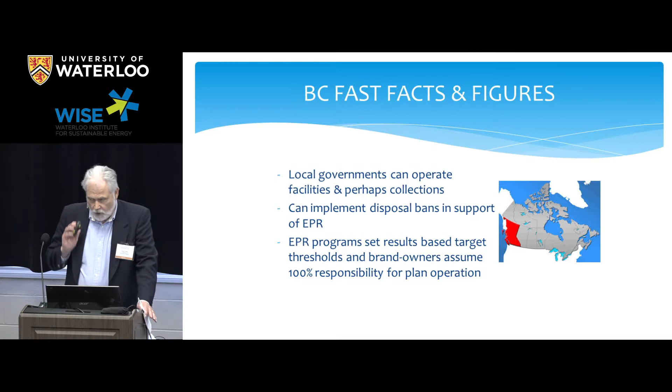BC EPR program targets are results-based. Here's where you're supposed to be. This is what we expect from you. And then the brand owners assume 100% responsibility for getting the plan in place and operating it.

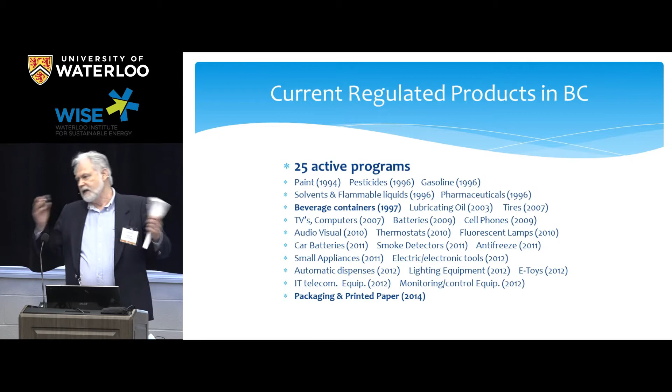Here's the current list. I don't know that it's dramatically different than anybody else's, but we've got 25 programs that are on the go right now. Every 5 years, each of these programs has to go through a program review, an update, and a reapproval. We've just finished, I think 3 of them are just finishing that. They're in the stages of it right now. I've highlighted 2 because that's the story I'm going to talk about later.

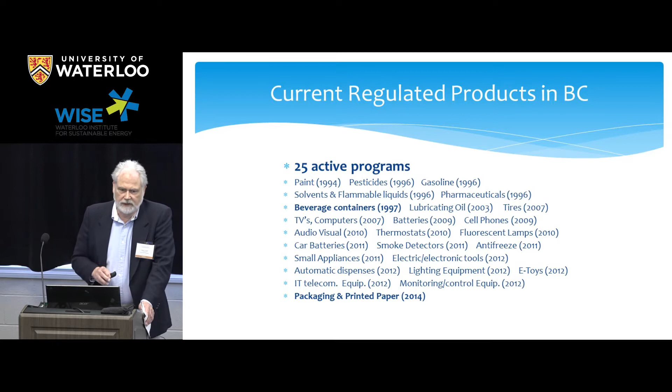The interesting thing is there's a couple of these programs, tires and used oil. The dates that are shown here are sort of the reissue. The original programs were, for all intents and purposes, consumer put money into the pot, went into provincial general revenues, and the province was in charge of running the program. I don't have to tell you that it didn't work very well. The dates that are on here is when they reinvented the program, turned it over to 100% EPR with the brand owners responsible.

Now, in terms of the future, CCME has suggested some future programs. The ministry, when I talk to them, they don't have any set timelines or dates for when they're going into these things. They're there, they're looking at them. Some of them are going to come on sooner than later, but there's no real time set now.

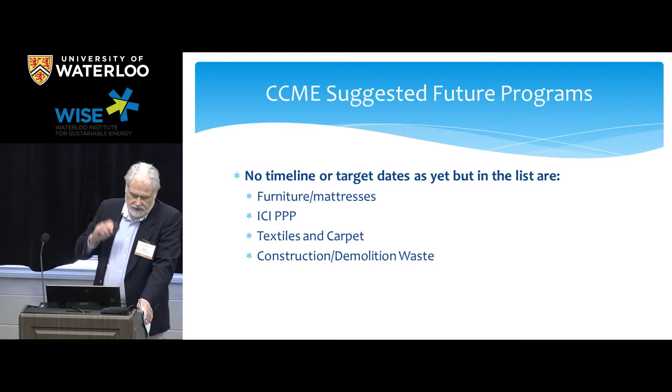The interesting thing is that while most people suspected construction and demolition waste would be sort of the next item, there's been a couple of interesting reports come out, including one that was done in terms of the Strait of Georgia and ocean waters between Vancouver Island and the mainland. One of the things they found is that a significant portion of the samples, the contaminants found in there were not things like polystyrene or polyethylene. They were, in fact, microfibers from synthetic textiles, probably a result of washing machine discharges. So my guess is, with the world being where it's at right now, I wouldn't be surprised to see that textiles would be sort of the next program if they go into it soon.

So now I'm going to tell you a little story. When I was in school, I had a university prof who believed in asking really nifty questions, and the answer you gave him had to be a story. So I'm going to try and tell you a story.

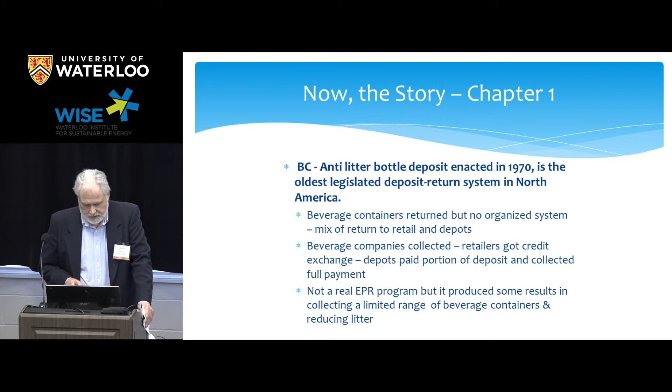In 1970, BC put into legislation an anti-litter bottle deposit. Now, we'd had bottle deposits before—as a kid, I'm sure you got 2 cents back for a bottle, and the corner store probably made you buy candy with it. Ultimately he'd turn that bottle into the beverage supplier, who exchanged it for one he filled and used. So bottle deposits weren't new, but this one codified it. It covered a relatively small list of beverage containers, and it wasn't a real EPR program—there was no definite organization, no reporting process. It just was there, and it helped reduce litter.

Second chapter in the story: in 1994, Encorp Pacific was established to create a province-wide network of depots to manage used soft drink containers.

Now, depots in BC were originally a real mixed bag—all kinds of various little operators, no real organization to it. Encorp came in and changed all of that. They put together a set of operating principles, they paid for the services, they created a professional depot operation.

At the same time, and this is the point of this whole story, a little plastics recycling operation that had been going on for probably 8 or 9 years wound up signing a contract with Encorp to process and market the plastics coming out of the beverage container system—Merlin Plastics.

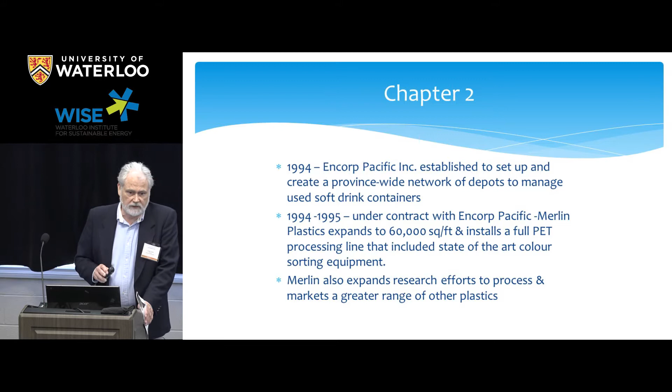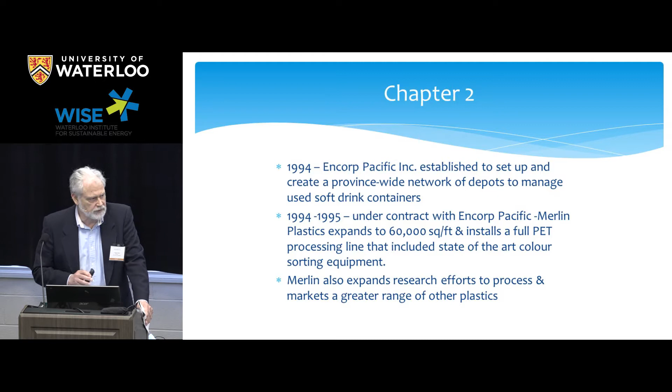He moved from what was in the beginning a garage—well, not really a garage, but it was that small. In 1995, they moved into a 60,000 square foot facility and installed a really innovative and progressive processing line for that time, including color sorting—nifty stuff in those days. At the same time, as people who know Tony and know Merlin know, it allowed him some flexibility to play around with other things, and he established a good reputation for willingness to attempt and try things.

Chapter 3: Recycle BC. Originally, Multi-Material BC was established to fulfill the requirement under the recycling regulation to manage residential packaging and printed paper. Wow—open the cupboard in your kitchen, look at the shelf. Practically everything on that shelf in terms of packaging is now going to be managed.

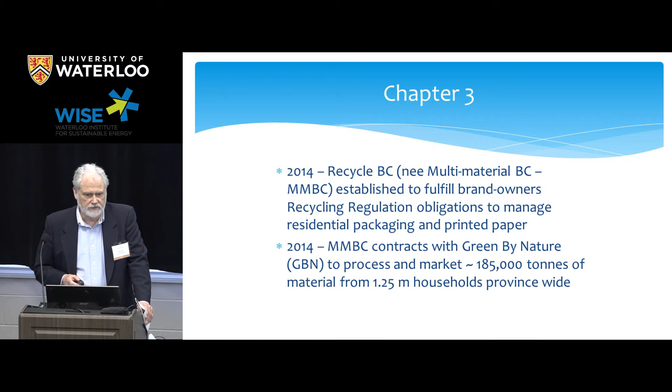At the same time, guess who signs a deal that incorporates Merlin, and he now winds up as the processor and marketer for a program that gathers 185,000 tons a year, services 1.25 million homes, and Green by Nature spends the better part of $32 million—20 of it into a new container reprocessing facility. They set up 200 depots, some part of the Encorp system and some new, together with 32 facilities to do collection and consolidation.

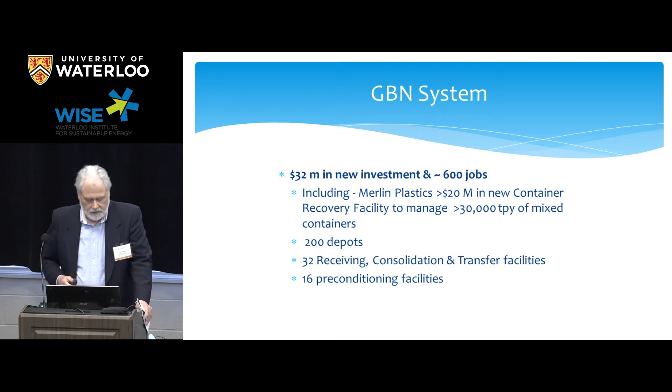The point of the story is this: if we're talking about getting to zero waste, there is no easy way to do it. It's complex. It's not going to happen instantly. It's an iterative process—we're going to have to go at it one step at a time.

In order to do that, I told the story because it shows you that when we have policies in place that give stewardship agencies or operators some security—reducing the risk in their investments, in their feedstock supplies, and the duration they'll get those supplies—operators will make the investment. They'll put in new innovative equipment, set up new innovative operations, and push the peanut further up the hill. They will aggressively go about it because there's security in doing that, a sense that they are part of moving forward and can afford to do that.

That's how we're going to get there.

What's one of the other things we have to have? I struggled with the next couple of slides here because there have been some events in BC. I honestly believe we have a very good system in BC—the ministry, our politicians, and our bureaucrats over the last 25 years have done a good job putting that system together. But you have to have an ongoing, strong level of understanding of what the system is and a commitment to science-based decisions.

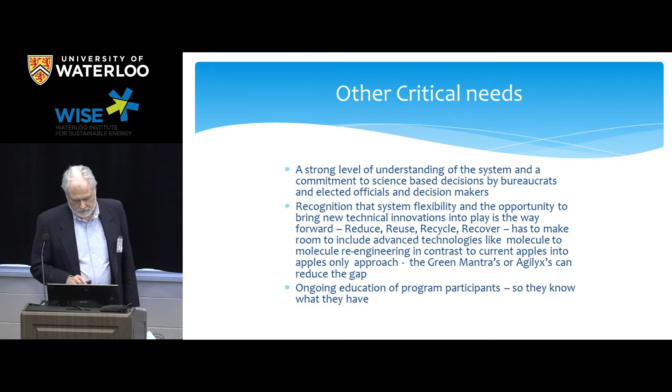And just to wrap it up, I'm going to tell you what I think is the biggest flaw in the system in BC. And I am so guilty of this one, because up until 3 days ago, if anybody had said to me that, in fact, there could be decision makers who could upset the balance of the whole system...

We've had a series of events, City of Victoria, City of Vancouver, who are deciding that despite the fact that we have extended producer responsibility programs, we have stewardship in place, materials are being managed within that system, they don't want those materials in there. City of Victoria is going to ban plastic shopping bags. They're part of the extended producer responsibility program. There's 300 return points that return to retail. There's depots. It was part of the existing program.

When I talked to the ministry about what the city was doing 2 years ago, their attitude and mine was, this is part of the environmental policy. The province is responsible. Remember in the beginning when I said the province manages environmental policy within extended producer responsibility programs. City can operate, but they don't have... wrong.

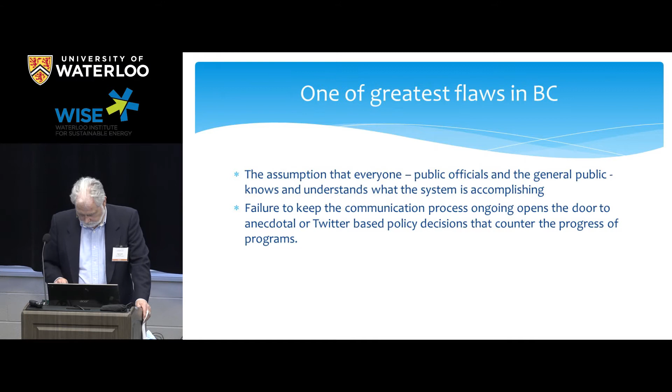Today I'm going to talk to you about the UK's change in waste management. We used to be a landfill-dominated country. In the last 20 years, we've gone from being that to being very process-orientated. This is really the journey we've been through, and how MBT particularly has fitted into that journey.

So let's talk about the drivers. There's two really key ones. Probably the most important was the Landfill Directive, an EU directive. As part of the European Union, as we still are at the moment, we're bound by those directives. So the UK was duty-bound to divert or reduce from its 1995 levels of 80% biodegradable waste going to landfill, down to 35%. Massive challenge by 2020.

We also, the following year, 1996, brought in a landfill tax regime. Landfill was incredibly cheap in the UK. It was abundant, it was cheap, it was our preferred disposal solution. It came in at $3.50 a tonne, really quite small, but it was due to escalate every year above inflation, so it was a change mechanism. So you had a fiscal mechanism and a legislative mechanism to change. Those were the two key drivers.

How were they to be delivered? The government body, DEFRA, introduced the Waste Infrastructure Delivery Programme. This was a mechanism to attract the private sector into building infrastructure that would support local authorities. DEFRA asked local authorities to come forward with deliverable projects that would divert waste from landfill, to help ultimately the UK meet its landfill directive targets and avoid infraction proceedings. So a successful project was one that diverted waste from landfill, but ultimately the private sector took on some risk. It was delivered through the PFI mechanism, or PPP.

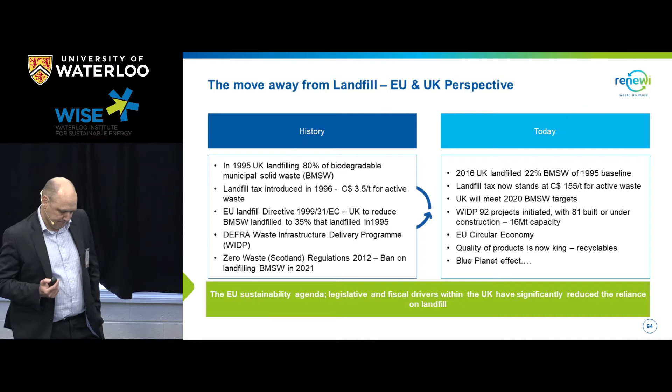So quickly, what is MBT? It's a bit of a panacea name, really. It's a number of things. The way I look at it is just a system of technologies, a group of technologies, with mechanical separation, some form of biological processing.

You can see there we have aerobic fermentation, so that's biodrying. We can dry household waste to produce dry fuels, high-quality fuels, that we can then put into the secondary market to substitute coal, gas and oil.

Composting, so we can actually stabilise the material. That's where MBT came from originally. Germany was very much stabilising the material before they put it to landfill. We can have anaerobic digestion, both wet or dry. Heat treatment, thermal combustion, pyrolysis, gasification - a number of technologies fitting together to form an MBT process.

Producing a number of materials from recyclable materials back into the secondary market, stabilised MSW, potentially as a pre-treatment to landfill, solid recovered fuels, refuse-derived fuels for different types of combustion process to recover energy, compost or digestate, heat, electricity, syngas, biogas, chemicals.

It's an enabling technology, and I think that's how you should consider MBT. It's a step change technology. It allows you to develop, as your systems develop, technologies come along, you can modify the processes around this to produce different products, different systems, different processes.

Quick look at some examples of some of the MBT projects built in the UK. We'll start with Derby, this one here. It's a plant that's 190,000 tonnes. It is right in the middle of the city, right next door to Rolls-Royce, so one of the biggest employers in the city, so very sensitive neighbours. You have to operate it in a way that doesn't cause smell, odour, flies, nuisance, anything. It's a plant that's just about coming out of commissioning now.

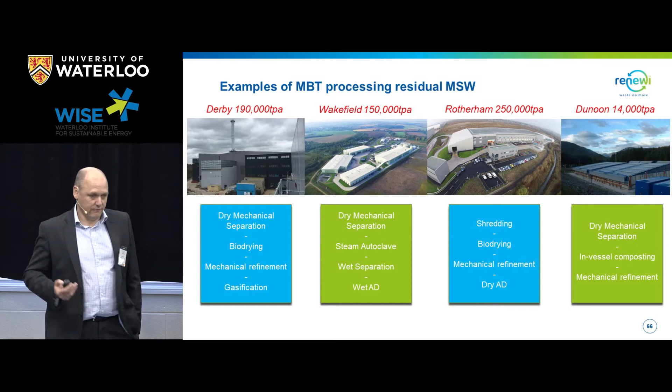So you can see from this, MBT covers a huge range of different technologies and systems. There's just 4 projects in the UK, there's dozens more. They're really there to address what the authorities wanted. Under that WIDP scheme, the key thing the government said was, you can do any technology you like, councils. You have the choice, so suit your local market. Some would go for incineration, some would go for MBT. So it really was allowed for the market, or the authorities, to decide what they wanted. Quite a lot of freedom to suit their political needs, their geography needs, and the desires of the local communities.

So there are obviously some advantages and disadvantages of all technologies. Let's look at what MBT provides first. I think it's a flexible technology system. You can change it, it's relatively flexible, even for changing composition, and certainly some of our projects that are now into year 15, we've seen significant changes in the composition of materials coming into these plants. So how do you manage that through a process?

The configuration will need to take account of the output market changing, so the materials you produce may no longer be acceptable in terms of specification. So you've got to allow a process to be flexible. I think MBT allows you to modify, tweak, change, add new equipment, take equipment out, change your process.

It's really quick to deliver. We can get these MBT plants built in the UK in probably about 18 months from start to finish, including permitting. There's energy from waste projects in some parts of the UK taking 10 years to get a permit, and that's before you start. So some real challenges around EFW.

EFW, mass burning EFW in the UK has been challenging to develop. I think less so now as the market's changed. There's more acceptance of EFW technology, and certainly the myths around all our children having 3 heads have largely gone. So it's easier to deliver energy from waste now. But in the early days it was very, very difficult. So really MBT was seen as a solution.

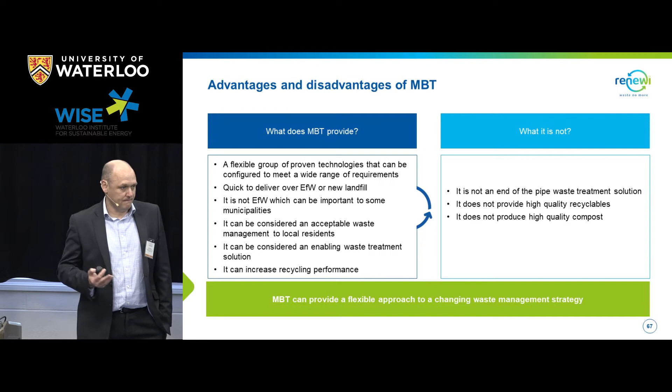It also doesn't produce high quality compost. In the UK it's still classed as a waste. So even our compost, which is reasonably clean, free of plastic, free of glass, still has other things in it - metals, heavy metals, but also some other unknown contaminants. So in the UK it's banned to apply them to any agricultural land. We can only use them in landfill restoration projects or non-food crops, growing biocrops, biomass crops, things like that. So a real challenge in terms of what you do with the compost fraction.

So what do we need to drive market certainty? And this is clearly the thing that I think challenges our sector the most in terms of where MBT now goes.

We need sustainable revenue streams. We took the risk at the end of these contracts - they're 25-year concession contracts. What do we do with this material for 25 years? So it's either a back-to-back relationship or you're in the market trying to find new relationships. The operator needs to make a return. Clearly, we're not a charity, but the off-taker really needs to see value in the product.

I'll give you examples of that. We supply quite a lot of SRF to the cement industry. The cement industry said, yeah, we'll take your SRF. Two years on, they're saying those long bits you get in there, we don't really like those because they block the pipe. And the CV, we said 16, but actually we want 18. And the price, yeah, we want a bit more for it, thanks. So we're paying for disposal. So you've got to manage your markets.

So some of the challenges around how do you deal with that market - quality will always improve, it won't go the other way. So when you start with a new product, everyone wants it slightly better. So the challenge is around what is that quality. You're looking at CV, you're looking at chlorine content, looking at those non-contamination issues you have with it. So trying to really drive that market.

Organics is a really good one. We've got back-to-back contracts with some off-takers restoring old collieries. The UK had a massive coal industry - it has no colliery deep mine coal anymore as of last year. So we've gone from, in 20 years, having 700 coal mines I think, to none. So there's lots of shale tips, so at the moment we have a ready-made source for restoration media material. Our output for our media is very simple actually - that's used as part of the restoration media to restore collieries. We're growing biocrops on some of those now, biomass crops for secondary combustion or even to synthesize for ethanols. So some innovation coming there.

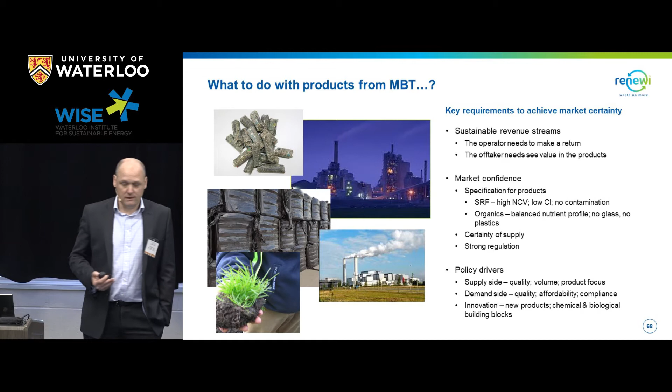So in summary, what do I think of MBT? I think it's a flexible solution - a group of technologies that can configure to meet desires of many things. So where you have authorities with different desires, different economies, different population centres, population densities, you could apply this group of technology across a wide number of different solutions. Cost effectiveness - it all costs money, this stuff, it's not cheap. You can have an MBT plant costing you $2 million up to $200 million, it just depends what the configuration of the equipment is and the size of it. So you need some kind of legislative framework as in why do we need to change, and probably a fiscal one, because ultimately if landfill is so cheap, why would you drive away from landfill in the first place?

Key thing, products are absolutely king. The success of MBT is all around what do you do with the stuff you make - it's just that interim step. So you really need to understand what am I making from this process, what is my market for that process, and how do I develop that market for that process? Thank you.

The focus of my presentation is about flexibility of a gasification process when it is used for resource recovery from waste. In agreement with the aim of this session, I will try to describe some case studies of waste valorization by gasification.

Let me start from the beginning. This is the well-known definition of the thermochemical conversion processes: combustion, where fast and complete oxidation produces a flue gas with only completely oxidized products; and gasification, the focus of this presentation, where a series of endothermic reactions in presence of gasifying agents produce a fuel gas which contains large amounts of not oxidized products.

This can be utilized in different sites at different times. Look immediately at the flexibility of the gasification process. It is able to treat different feedstocks with different gasifying agents, producing different products that can be utilized in different sites and at different times.

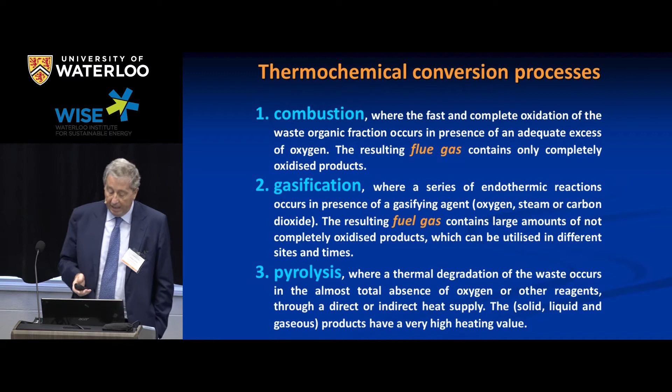Simply speaking, the gasification of waste, of biomass, and also coal leads to the formation of a producer gas, which is a mixture mainly of carbon monoxide and hydrogen with some percentage of methane, with different impurities in terms of organic and inorganic compounds.

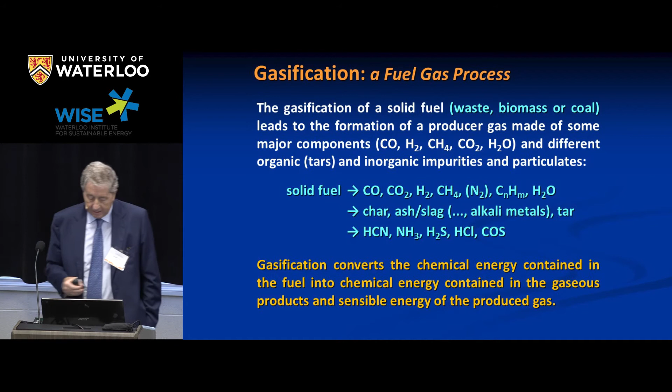In simple terms, the main aim is to convert the chemical energy contained in the waste into the chemical energy and sensible energy of the producer gas. It has a number of important aspects that increase its flexibility, in particular when compared to conventional direct combustion. This is a list of these.

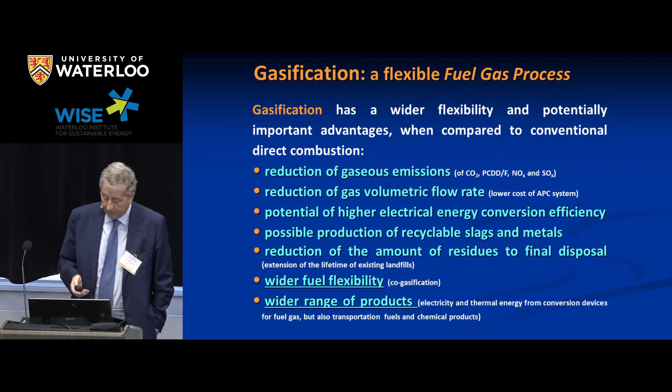In particular, gasification has the possibility of wider fuel flexibility and a large range of possible products. Looking at the large flexibility in input, it is possible to gasify biomass and municipal solid waste, but I will describe today commercial scale plants able to gasify bottom ash from conventional waste-to-energy incinerators, mixed waste from mechanical biological treatment, sewage sludge, and reclamation waste.

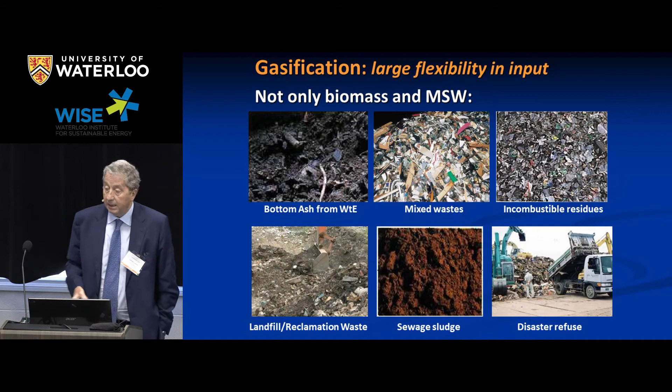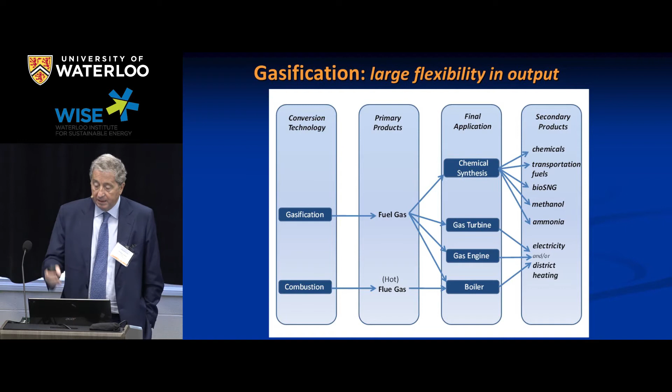There is also large flexibility in output, because the fuel gas obtained from the gasification process can be sent, based on the level of cleaning of this fuel gas, to a boiler, to a gas engine, to a gas turbine to produce electricity and district heating, but also to chemical synthesis with a certain number of secondary products.

An example of this large input flexibility is a plant that I hope to have time to describe today, where indirect gasification is utilized to produce a syngas that is then sent to a methanation synthesis to produce biomethane from biomass and biowaste.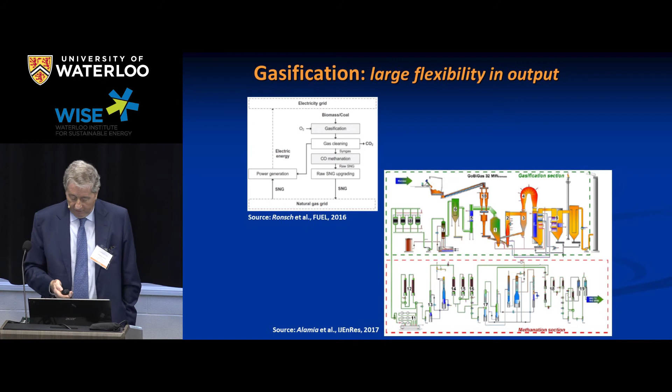The technical feasibility of this process has been demonstrated in a Swedish project that was concluded a few months ago, at the end of March of this year.

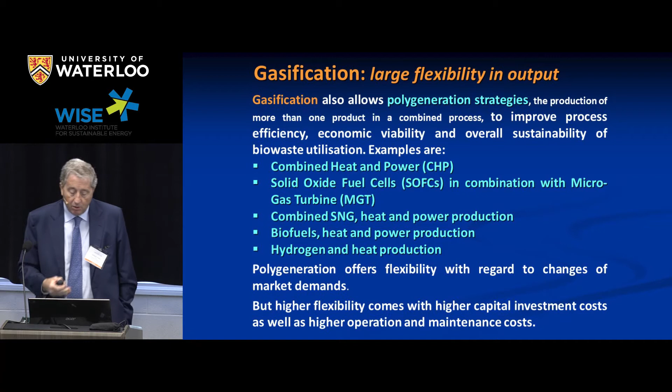This incredible flexibility also allows polygeneration strategies, meaning the production of more than one product in a combined process. This is a list of these possible strategies. Obviously there is a higher investment and maintenance cost, but there is also the possibility to follow changes in market demand.

I'm smiling because it's a project we are preparing that involves a number of Italian universities. There is again the possibility to utilize gasification, after syngas cleaning, to follow two possible production paths: biomethane from the process I showed before, or the production of bioplastics by a fermentation system.

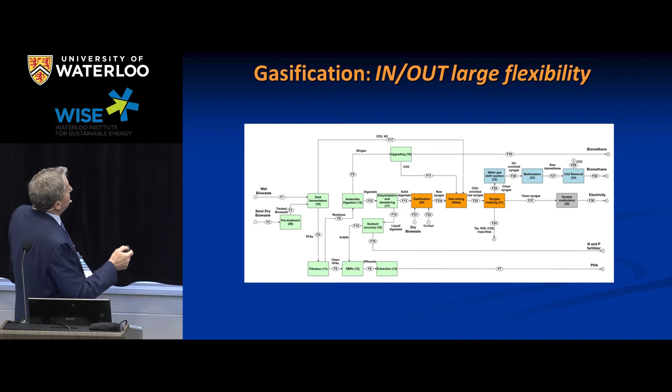There is also an idea to evaluate a more complicated combination of treatments for wet biowaste, semi-dry biowaste, and dry biowaste, utilizing different kinds of biological treatment and thermochemical conversion to produce, as an example of polygeneration strategies, biomethane, bioplastic, electricity, and so on.

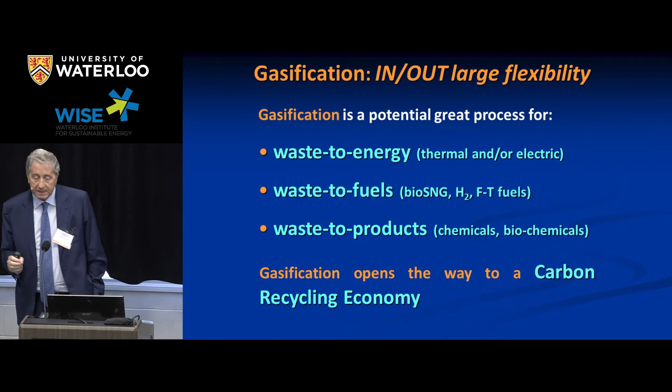In other words, this large flexibility of the gasification process for waste-to-energy, waste-to-fuels, or waste-to-products suggests that gasification could be one of the best processes to open the way to a carbon recycling economy, which is a little different from a recycling economy because it's more transparent. I hope to have time in these two days to discuss the necessity of transparency when we speak about the recycling economy.

Let me spend a few minutes on the types of gasification process we can use. There is direct gasification, also called autothermal gasification process, and indirect gasification, also called allothermal process.

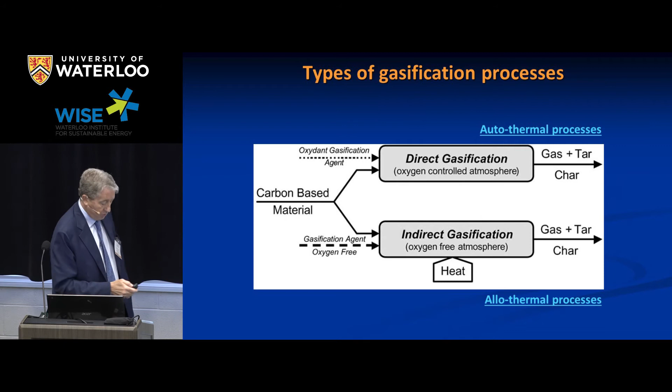The heat necessary for the endothermic reaction of gasification is produced by the partial oxidation of the waste or biomass in the gasifier itself, depending on the type of gasifying agent: air, oxygen, enriched air, or pure oxygen. It's possible to have different heating values of the obtained syngas, until obtaining a mixture which could be a good basis for production of transportation fuels.

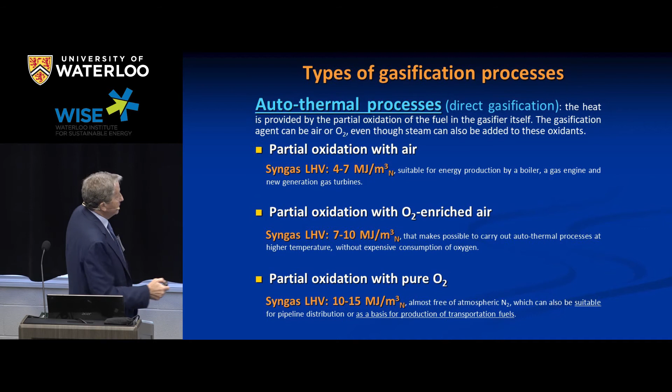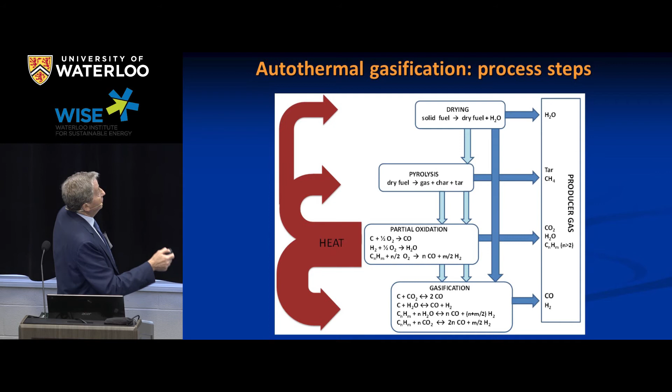In this case, the energy obtained from partial oxidation is utilized for 5 or 15% for drying and pyrolysis stages, and the rest for the gasification reaction.

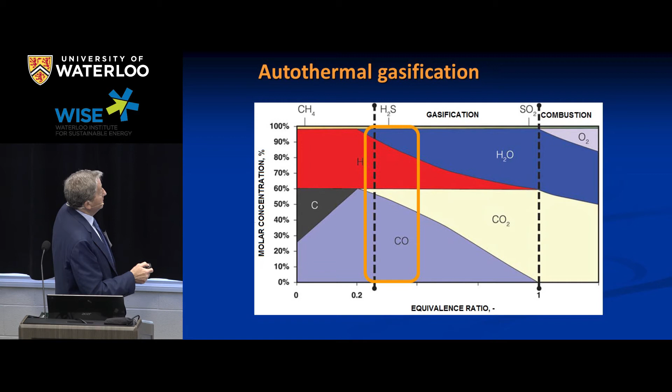The main parameter here is the equivalence ratio, the ratio between the oxygen really fed to the plant and that necessary for stoichiometric combustion. In this way we get not more oxidized products, but a mixture of CO and hydrogen. We work in a range between 0.25 and 0.5 to obtain the best mixture of fuel gas.

In terms of specific enthalpy, this means we work under the carbon boundary, to avoid any presence of charring in the gasifier, and to utilize part of the chemical energy of the gas to produce the energy necessary for the endothermic reaction.

The other kind of gasification, the allothermal processes, are very interesting for the production of chemicals or transportation fuel. In this case, the process includes only endothermic reactions, so there is a necessity to obtain energy from outside, from external sources. The best gasifying agents here are steam or carbon dioxide.

One system combines a bubbling fluid bed gasifier with a circulating fluid bed combustor. In this gasifier, steam produces the fuel gas; the unconverted char is sent to the combustor, where it is burned, and the hot bed material is moved from the combustor back to the gasifier to transfer the necessary energy for the gasification reaction.

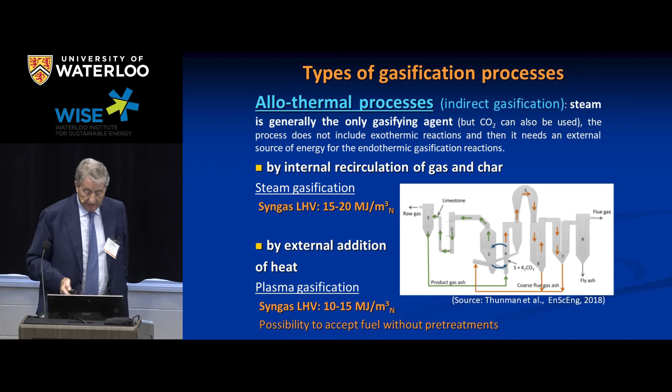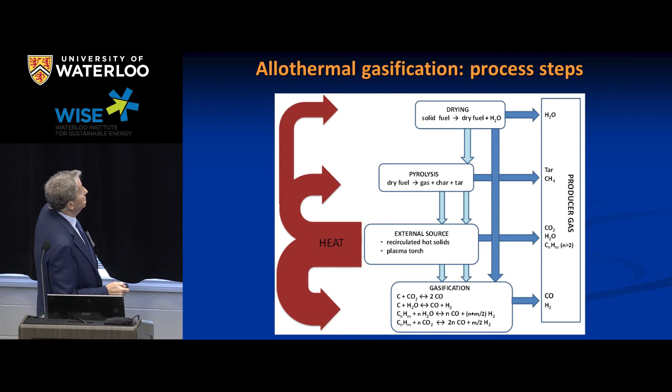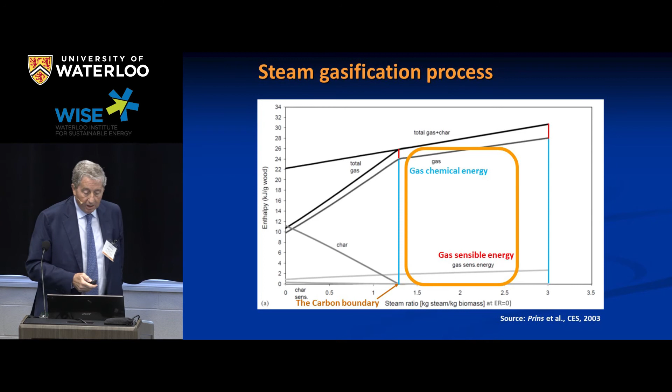Another possibility is plasma gasification. In this case, external sources, recirculated hot solids, or a plasma torch produce the energy necessary for the endothermic stages. The key parameter is no longer the equivalence ratio, but the steam-to-biomass or steam-to-waste ratio. We work across a large range of this parameter. There is no decrease of the gas chemical energy, because after the carbon boundary more steam is added, and the water gas shift reaction increases the chemical energy content of the produced gas.

Another very interesting type of gasification is the co-gasification process, which means co-feeding different materials to improve process performance, particularly in terms of syngas energy content.

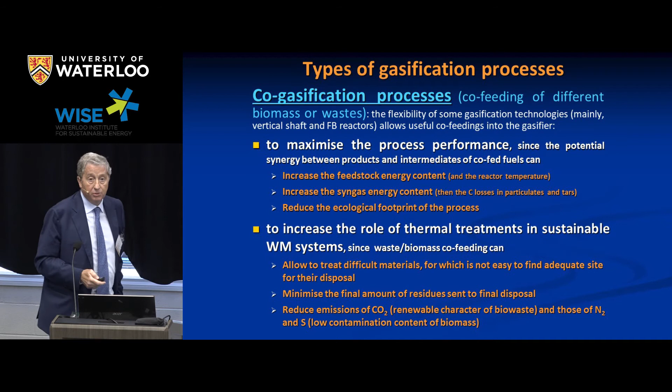In the case of waste, this is very important, based on the good experience obtained in Japan over the last 15 years, to increase the role of thermal treatments in a sustainable waste management system — allowing the treatment of difficult materials and minimizing the final amount of residues to be sent to disposal. This is a list of possible materials that can be co-fed.

Obviously, it is necessary to choose appropriately the blend and the blending ratio in this kind of process.

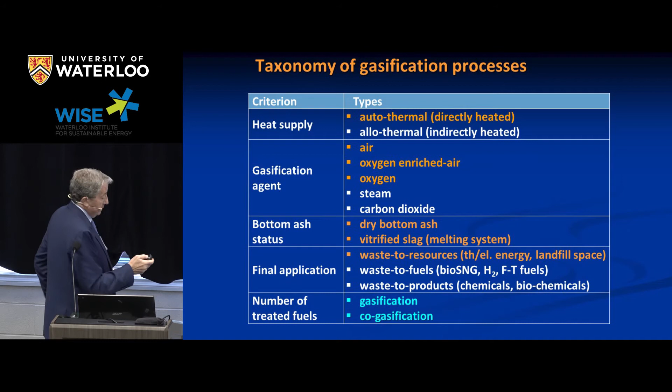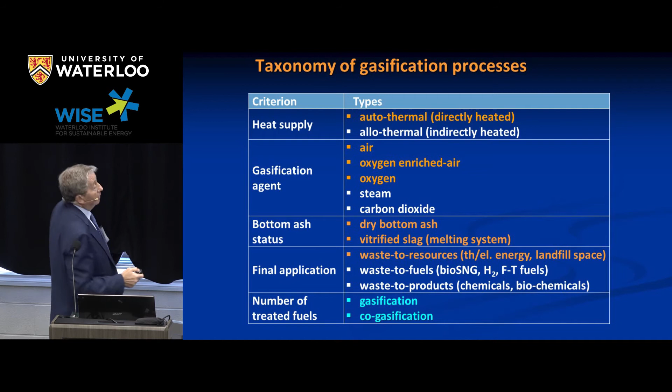I conclude this introduction with this taxonomy of gasification processes, showing the types of direct and indirect gasification, the type of gasifying agents, and the final application. The different colors indicate, for instance, that waste-to-fuel or waste-to-products necessarily requires an allothermal process with steam or carbon dioxide, while waste-to-resource, shown in yellow, can also be obtained with an autothermal system.

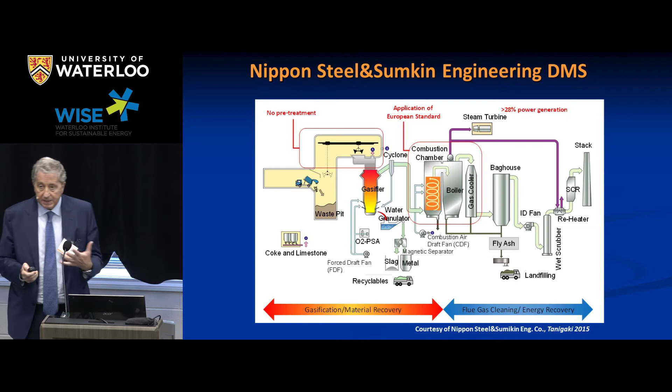I want to show you two main case studies. One refers to the leading, most proven technology in Japan and in the world, called the direct melting system. It is a particular kind of reactor, a vertical shaft reactor, with high temperature at the end of the reactor, having 3 zones.

These zones are drying and preheating, thermal decomposition, and combustion of the ashes. This system works with no pre-treated waste, which provides a lot of economic savings, with the introduction of a certain amount of coke, about 40 kilograms for each ton of waste, and some limestone.

The system has been designed in Japan to work with municipal solid waste together with sewage sludge, bottom ash, landfill waste, and clinical waste.

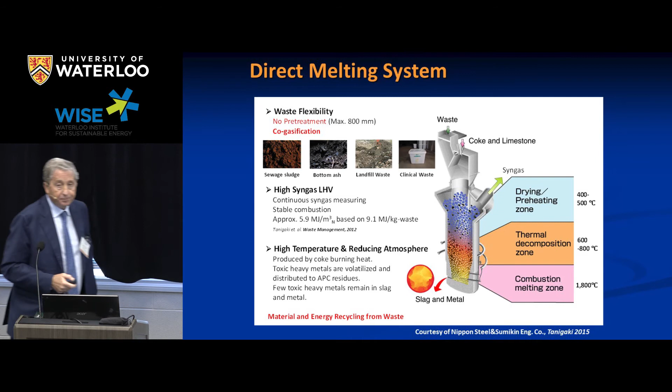The high temperature obtained at the end of the reactor allows obtaining melt slags that can be immediately recycled. Let me briefly indicate the reason why.

First of all, this coke bed layer increases the temperature at the bottom to 1,800 degrees C. This allows treatment of a wide range of wastes, including bottom ash from conventional incinerators, glasses, iron, and so on. In particular, this high temperature reducing atmosphere also imposes the devolatilization of lead and zinc.

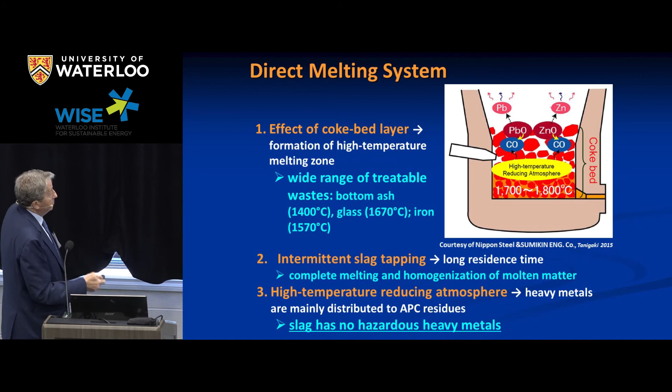This means that we have the possibility to have no more zinc and lead in the slag, and the possibility to have no hazardous heavy metals. We made a specific study taking into account official documents from the Japanese government about

40 plants in Japan and 45 European incinerators. This is the distribution of zinc: 50% in bottom ash, 50% in the air pollution control residues, while in the case of gasification, less than 1% is in the slag.

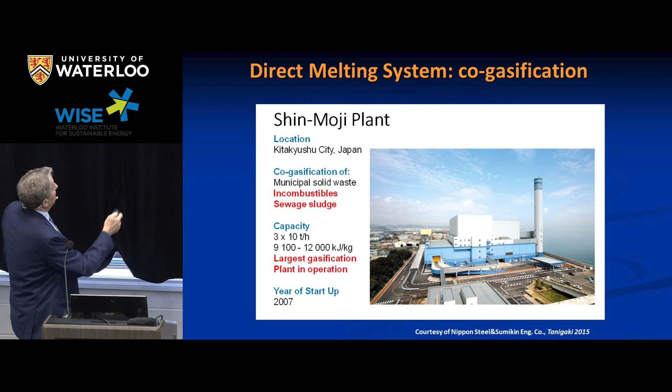This means that plants like this, which are the largest gasification plant in operation in Japan, have the possibility to produce very clean output compared with a municipal solid waste incinerator. Here there is all the lead and zinc into the bottom ash; here there is only in the fly ashes, and no zinc and lead in the slag.

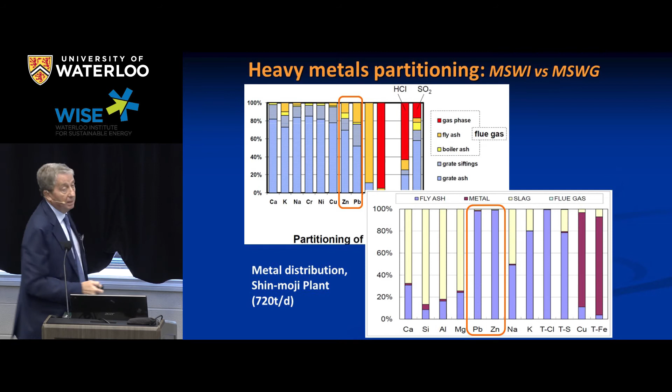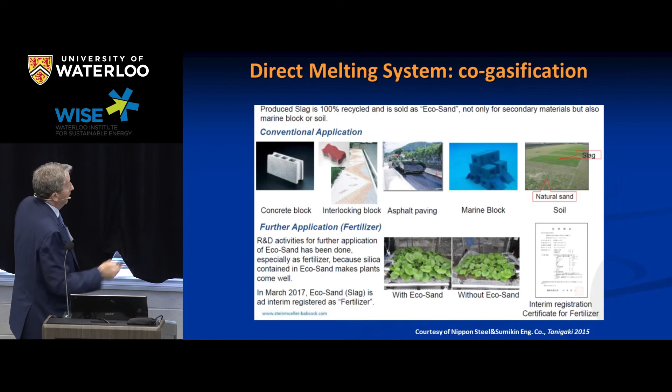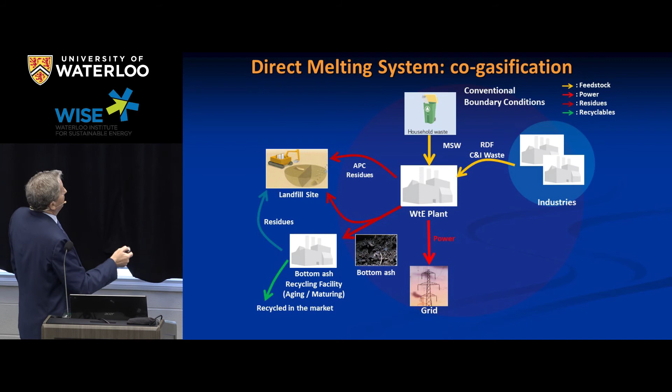Then the slag can be utilized for concrete blocks, interlocking blocks, asphalt paving, and also as eco-sand for some agricultural utilization. There is also the possibility to expand the conventional boundary conditions typical of a waste-to-energy plant, which burn all the waste and RDF but have to produce bottom ash that has to be treated and so on.

In the case of this kind of plant, you have the possibility to utilize sludge, to utilize clinical waste, to treat also some reclamation waste. This expands the boundary conditions.

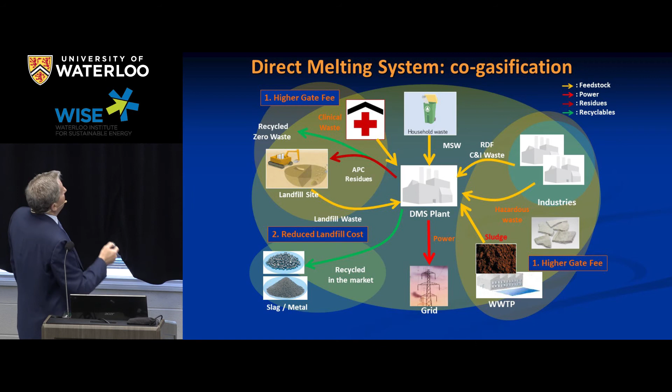There is immediate recycling without any treatment of the slag, and we are very close to a zero waste option that also allows the possibility to increase the gate fee, to reduce the cost of landfill, but also to reduce the necessity of landfill.

In Japan this is a very big problem. This is another plant that has been in operation for about 8 years now, and this system allowed a reduction of about 90% in the final amount of material sent to landfill compared to the previous conventional incinerator plant.

I have a couple of minutes. Three minutes, he said three minutes. I accept three.

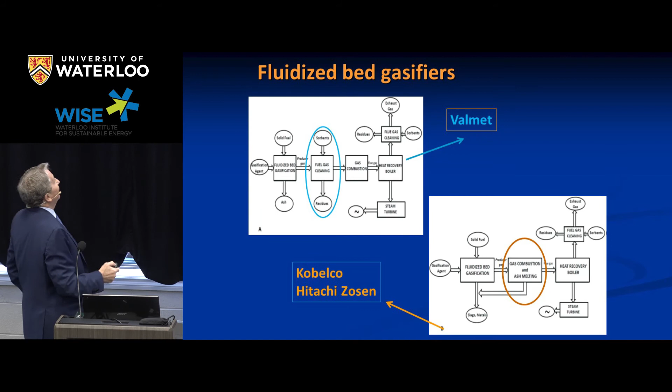There is some information about this plant from Finland, the Lahti energy plant. It is a circulating fluid bed gasifier with a good idea of intermediate stage gas cleaning.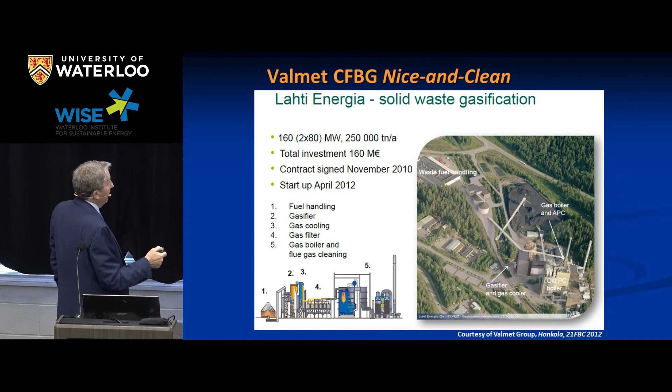After the gasification there is a cooling system and a particularly innovative filtering system in order to have clean gas to be burned in a gas-fired boiler. This means that the gasification is carried out at the typical temperature of a fluid bed gasifier, and the syngas is cooled down to about 400 degrees C.

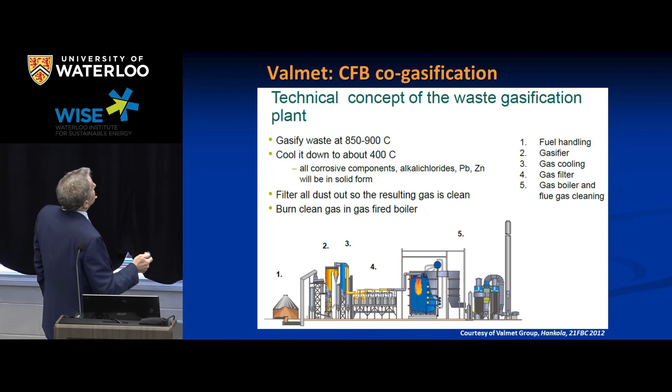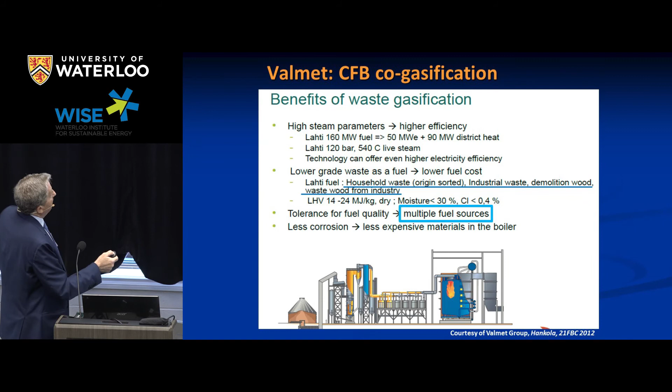All the dust and chlorine is eliminated in this step, meaning they have such clean gas that they can increase the steam parameters up to 120 bar, 540 degrees C. This means higher efficiency, lower fuel cost, the possibility of co-gasification, and less expensive materials in the boiler.

These are the crucial parts of the cooling and the filtering. This is a particular filtering system with mineral bags, metal bags, and this is where additives are injected to reduce the chlorine content and to increase the steam parameters up to the value I mentioned before.

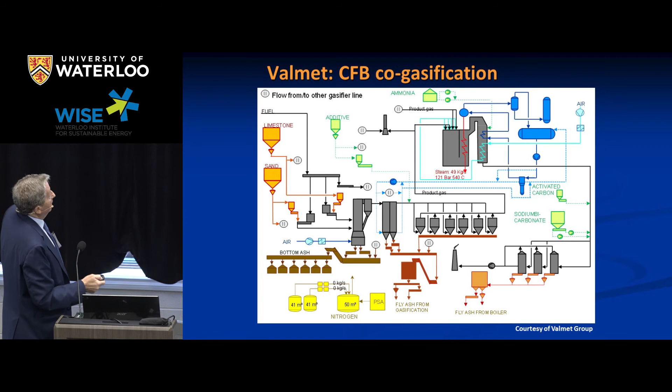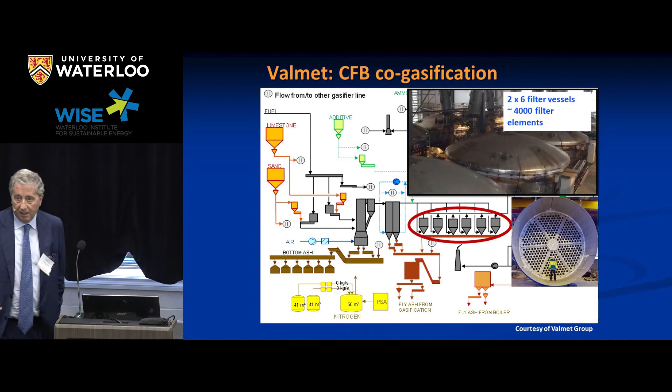This is the gasifier. This is one of the 4,000 filter elements that are cleaned by a jet of nitrogen. This is the gas-fired burner.

Finally, this is just a picture to indicate the possibility to consider not only the biogas road, which is an excellent route for biomethane production from anaerobic digestion and upgrading of the biogas, but also biowaste gasification and catalytic methanation.

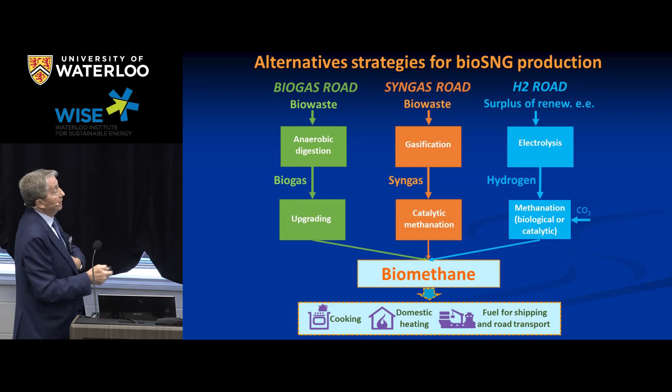I mean that we can move from 0.15, 0.2 carbon-to-biomethane efficiency up to 0.4 carbon-to-biomethane efficiency. This is very interesting.

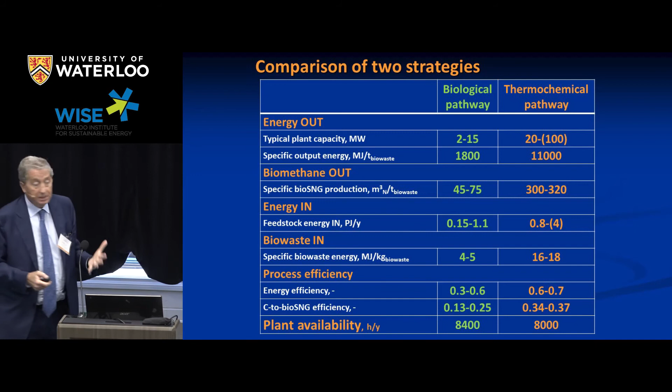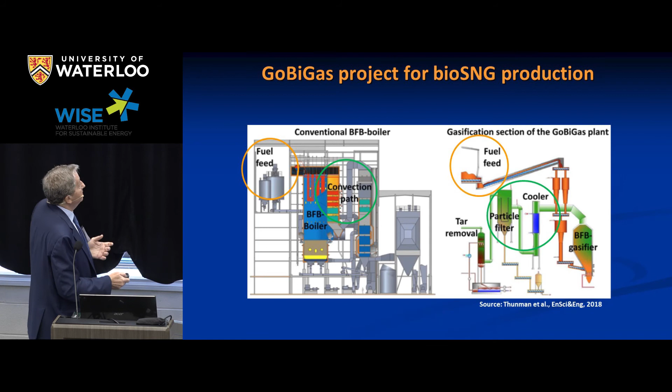I have no time to show you the details of this plant, which worked for more than 8,000 hours in the last year, but with a very interesting system for reducing tar production by adding potassium and sulfur in a very innovative way.

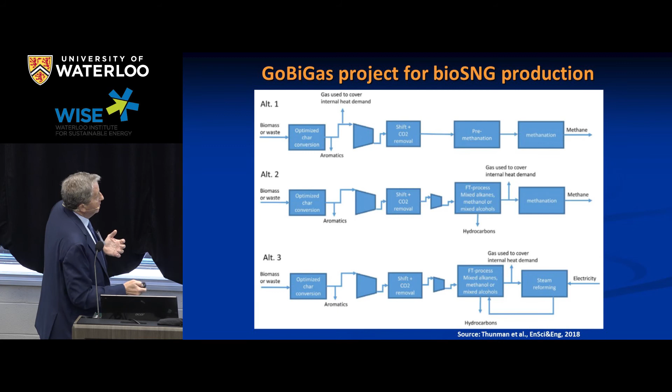And there is now the necessity to make this system also economically convenient by producing not only biomethane, but also hydrocarbons in different configurations.

So in conclusion, gasification plants may accept a wide variety of wastes and biomass, including bottom ash from incinerators, and appear suitable for waste to resources, waste to fuels, and waste to products. In my opinion, this is the thermochemical conversion process that better supports a carbon recycling economy.

Good afternoon, Professor Anderson, and fellow attendees and panel. Thank you for your presentation. My question is for Mr. Keith Sinfield. First off, I'd like to say, go England for the World Cup.

My question is regarding the use of organic products for land application from MBT facilities in the UK. Perhaps you could shed some light as to why the UK does not permit the use of organics derived from MBT for land. Is it specifically related to the quality, that a product cannot be produced with comparable quality in terms of trace metals and inert material to native soil or other compost?

Okay, can you hear me? Yeah, good.

It's a really good question, one we've wrestled with for the best part of 15 years now, from the very early days of that small plant in Scotland I showed you, where that was its output source, was to use this material. Our regulators, the Environment Agency and SEPA, the Scottish version of the Environment Agency, have some strong views around the risk with that material. So whilst we can make a nutrient-rich material, in terms of beneficial use we can remove the glass, remove the plastic contamination, and control the heavy metals, but not entirely. For example, zinc, copper, lead are always a challenge with their threshold limits. But then if you look at the soils we're applying it to, you may find higher levels naturally there, or from contamination from previous land uses. So it's a conservative approach.

It's an approach they've taken. We don't know what else is in there. There's a lady called Dr. Nina Sweet, who looked at this for the Environment Agency as a policy advisor for a number of years. They identified, through research with a number of universities, other things that could be in the waste stream that could potentially be bioaccumulating - up to 800 different compounds that could be in domestic black bag waste. So the challenge is we don't know what the long-term effect of applying those to land is, and therefore we shouldn't. It was a very conservative approach.